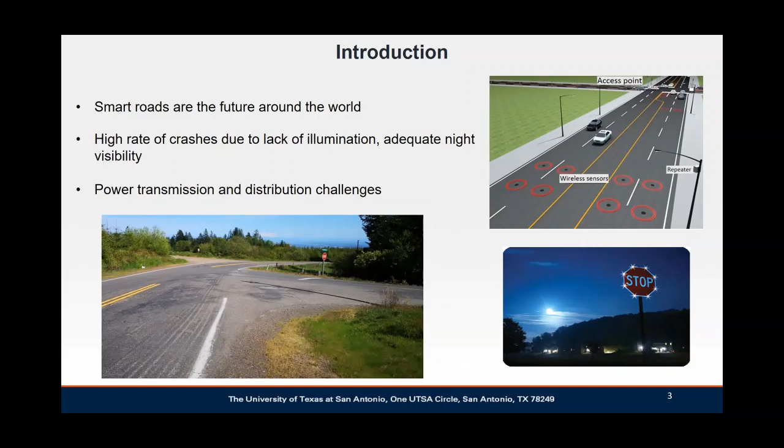So here we try to use energy harvesting. Energy harvesting could allow us to take advantage of unused energies in our roadways. For example, here in the United States we have 6 million kilometers of roadways paved with asphalt pavement. As you know, asphalt pavement could absorb a lot of heat energy, and this could increase the temperature of the pavement up to 60 or even 70 Celsius degrees.

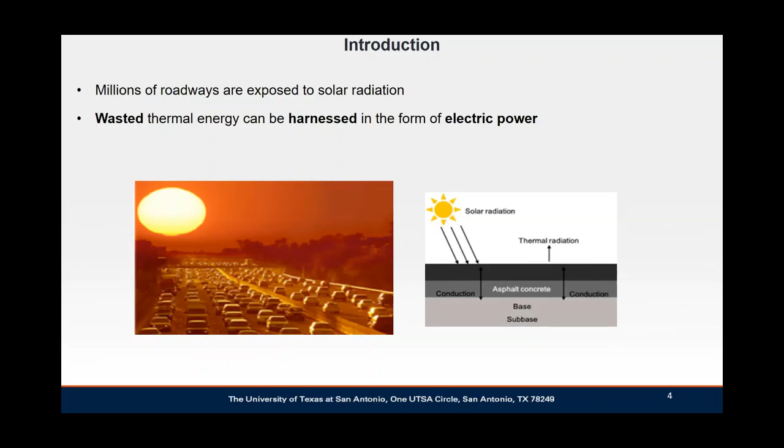So this source of energy is always available and unused, so we can take advantage of that to produce electricity. In our research, we try to develop and optimize thermoelectric energy harvesting for our roadways. To accomplish this, at first we try to identify the optimum design for our prototype to produce high power out of that, using Abaqus for simulations.

After that, we try to evaluate the factors affecting the performance of our prototype. At first, we evaluated the temperature of our pavement, trying 45, 55, and 65 Celsius degrees. Then we evaluated the size of TEG, number of TEG, and the TEG configurations. I will explain about the TEG module in the next slide.

After that, we tested our prototype in the lab and in the field to evaluate the performance of our prototype.

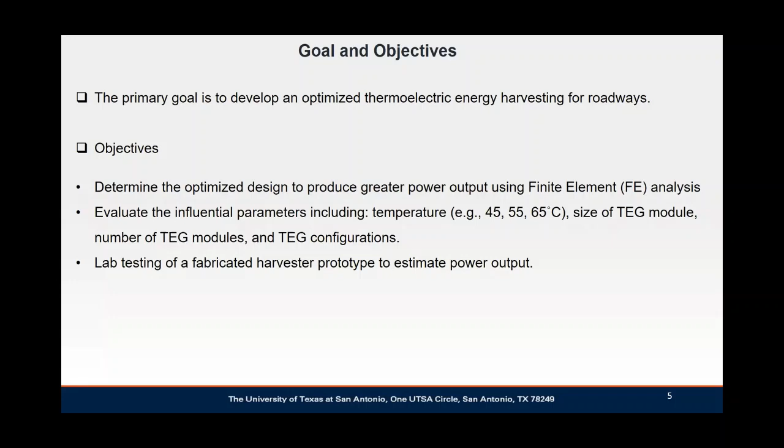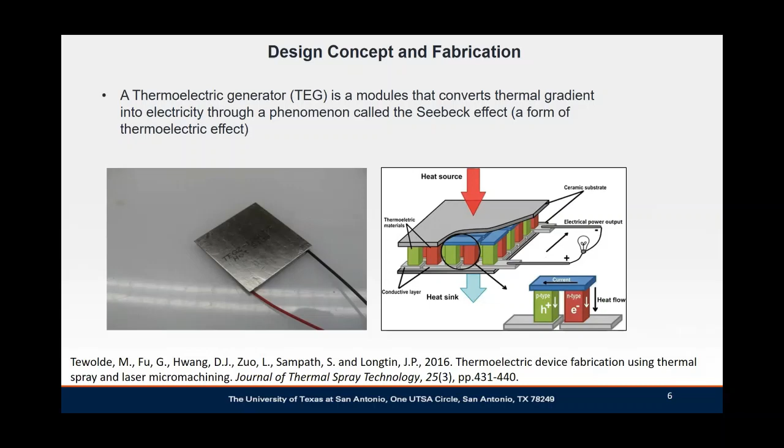Our copper plate is inserted 3 centimeters below the surface of asphalt concrete in order to absorb the heat and transfer it down where the hot side of the TEG is attached to the copper plate. Our heat sink is going to provide cold temperature to the cold side of our TEG. By this technique, we created a temperature difference, so our TEG module would produce electricity.

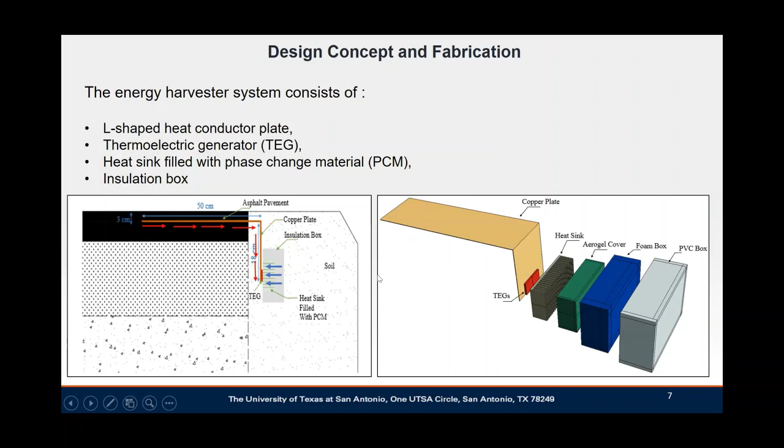Here you can see the design of our insulation box. This box minimizes the heat exchange between the soil and our heat sink. It's composed of an aerogel cover, foam box, and PVC. Here you can see our L-shaped copper plate, and the vertical part of it is insulated with aerogel, which has very low thermal conductivity. This material was initially introduced by NASA for its spacecraft.

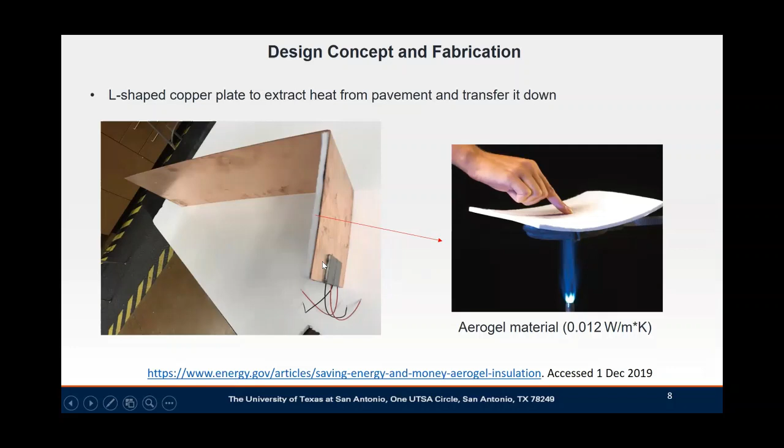At the bottom of the copper plate, we have attached our TEGs to absorb the heat. Here you can see our heat sink, which is filled with phase change material. Then you can see the layers of our insulation box: aerogel and styrofoam, with the outer layer being PVC.

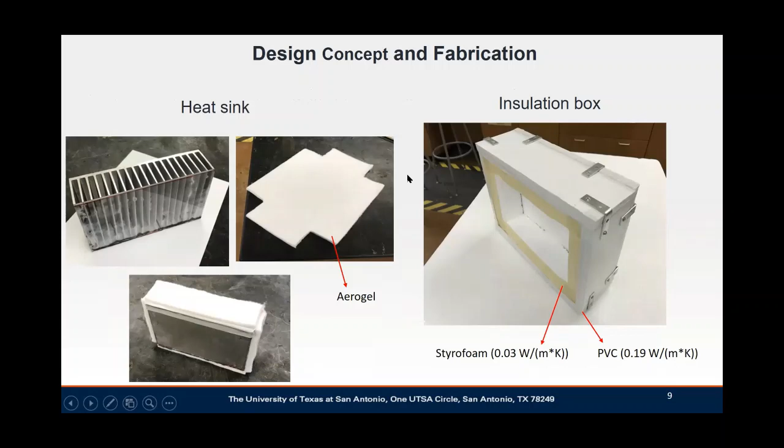Here you can see our phase change material, or PCM. PCM can absorb heat without changing its initial or performance temperature. We use a microencapsulated PCM, which is like a powder, to maintain the temperature around 18 degrees for cooling purposes. Here you can see our heat sink filled with PCM, and we also inserted a thermal sensor to record the temperature variation over time.

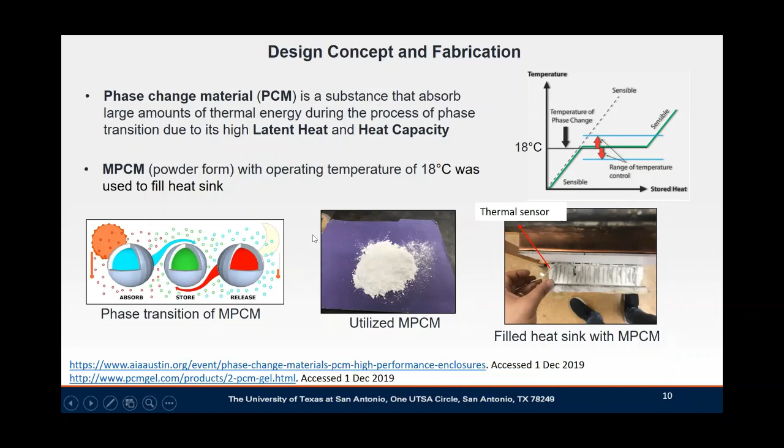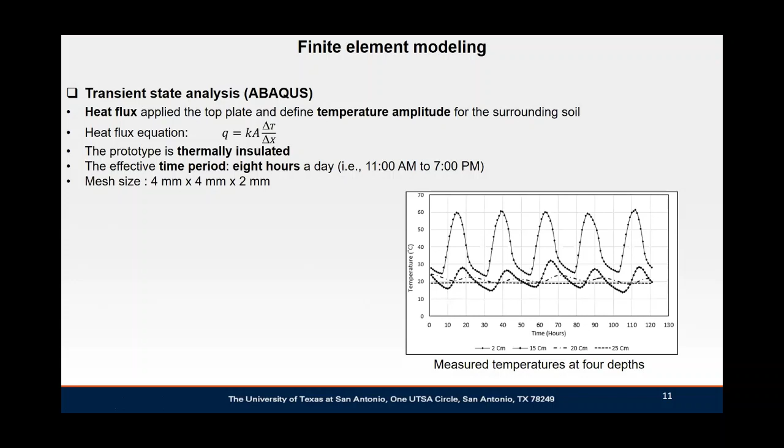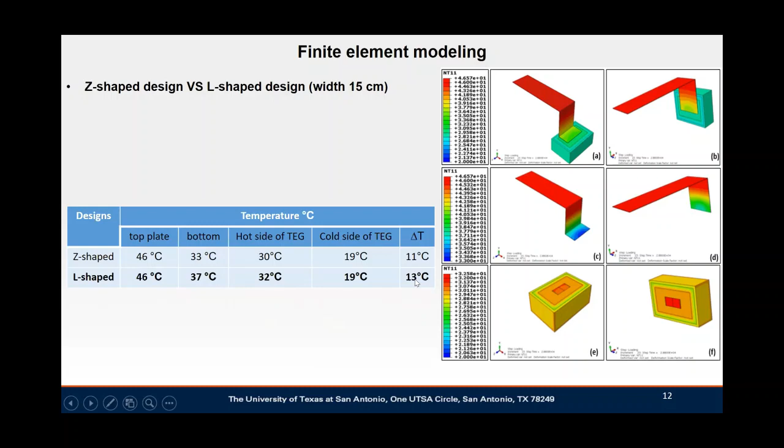First, we compared the performance of a Z-shaped design and an L-shaped design, both with widths of 15 centimeters. In the table, you can see the top plate for both experiences a temperature of 46 Celsius degrees. But at the bottom of the plate, where the TEGs are attached, the L-shape delivers a temperature of 37 Celsius degrees, showing it performs better than the Z-shape. Eventually, the delta T that the L-shape model experiences is about 13 Celsius degrees, so we selected the L-shaped design for our prototype.

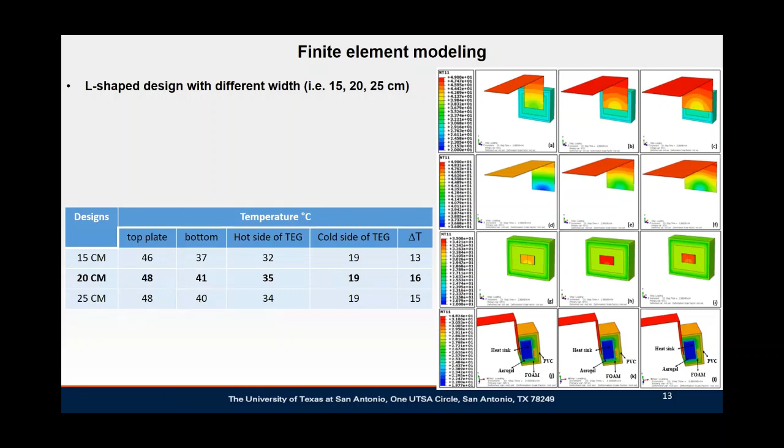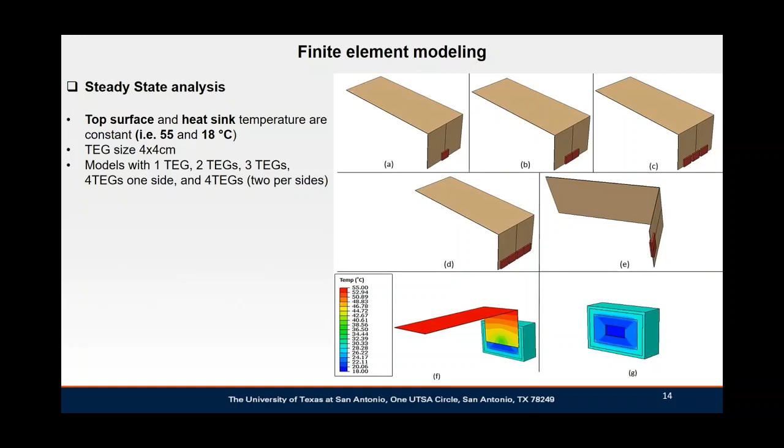When we are having more TEGs, the amount of heat that the copper plate could deliver is going to be distributed between our TEGs. So each TEG would experience less heat if we use a high number of TEGs. And on the cold side of the TEGs, the temperature would increase if we increase the number of TEGs, and consequently the delta T that each TEG would experience would be reduced. This adversely affects the power output of our prototype.

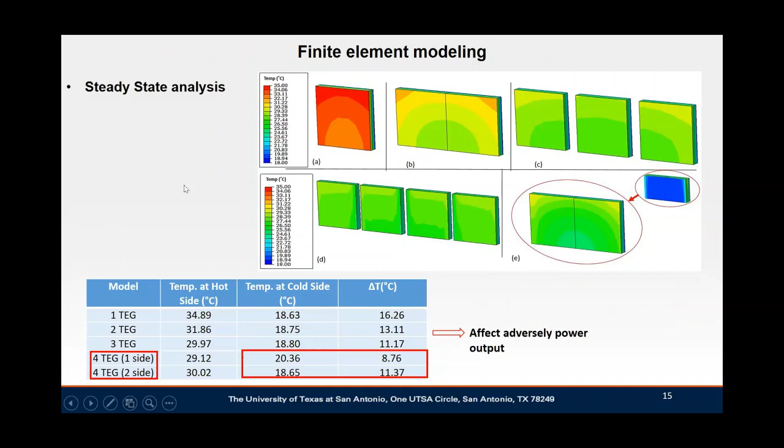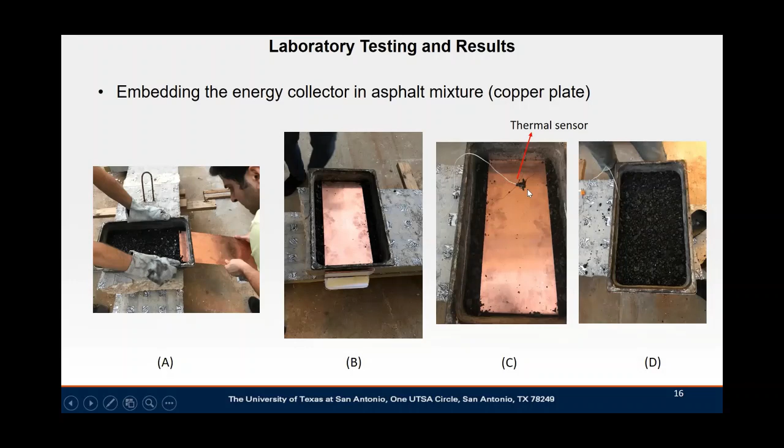Here you can see our embedding process of the prototype inside the asphalt mixture. In figure C, you can see we have attached a thermal sensor in order to record the temperature variation over time, and then we tested our prototype in the laboratory.

We developed 9 different prototypes, with 2 sizes of TEGs, 4 centimeters and 6.2 centimeters. So we have 5 prototypes that include the TEG with size 4 centimeters, and 4 prototypes with the TEG size of 6.2 centimeters.

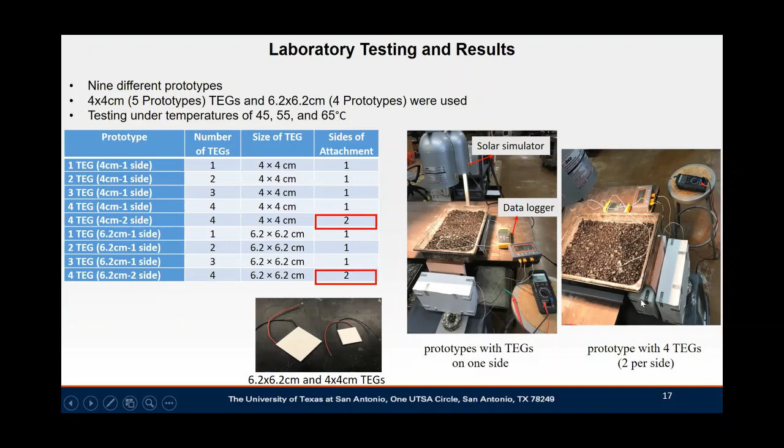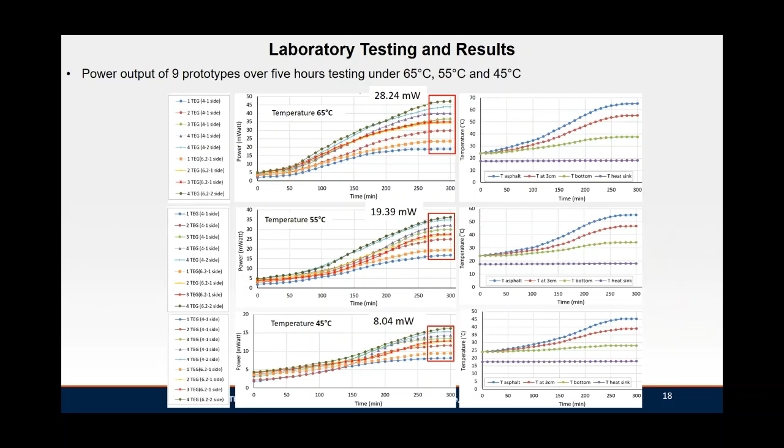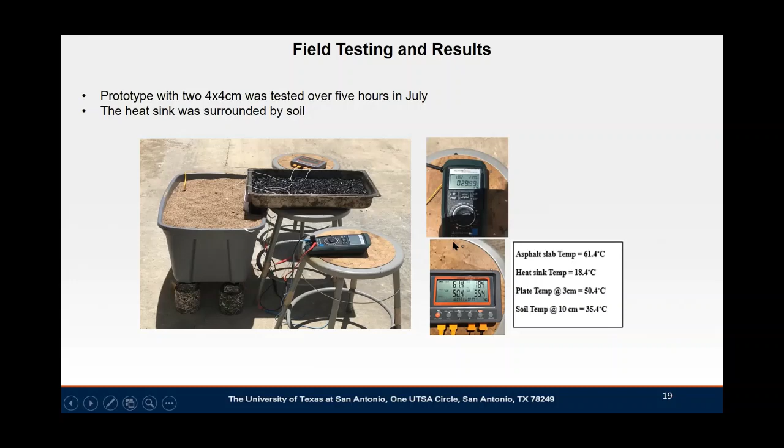These are the conclusions we obtained. Our design could produce power approximately 2 times greater than other designs developed by research groups at different universities. Our coolant module could maintain the temperature around 18 or 19 Celsius degrees, which is a good achievement, because in other research, soil or water used to fill heat sinks could not maintain lower temperatures due to the latent heat property of those materials. So PCM could be a good option for cooling purposes.

We also realized that increasing the number of TEGs will not increase power output linearly, because as I explained earlier, when we increase the number of TEGs, the amount of heat each TEG experiences is reduced. Also, if we use a TEG with a size of 6.2 centimeters, it's better to ensure that in that region the pavement temperature is enough to take full advantage of this prototype.